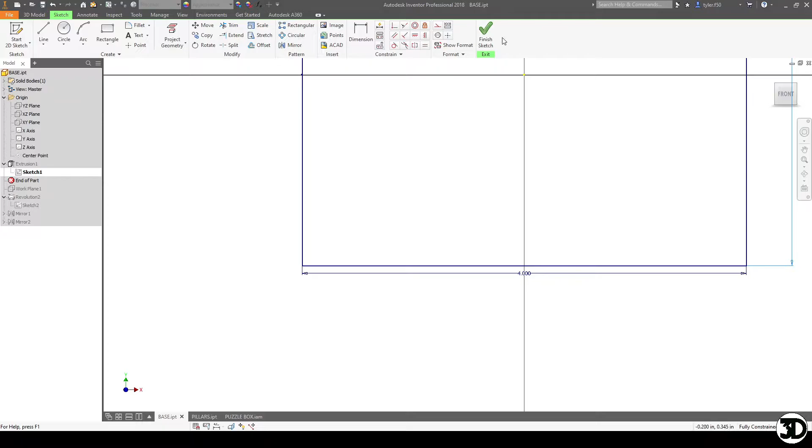To start off with, I made a base plate that is 3.5 inches by 4 inches, and 1/8 of an inch thick. So this is the first piece I designed.

Next, I made a pillar, which is going to be the corners, 1/2 inch diameter by 3 5/8 tall. After that, I wanted to make these pieces fit together.

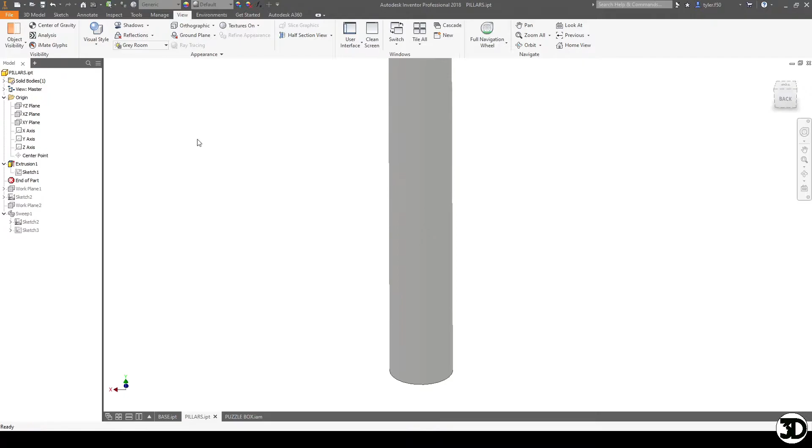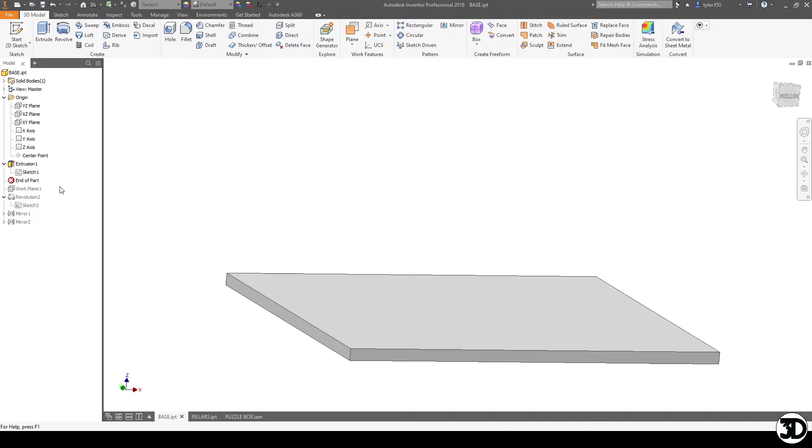The way I designed this is I made 2 work planes: one that's 1/2 inch away from the center point, and another that's 1/8 of an inch from the bottom. The reason for this is I wanted the base plate to be elevated by 1/8 so that there's a little bit of clearance, so the pillars are actually like the feet of the puzzle box.

Next, I did some sketches. The first sketch you'll see here is essentially going to be my dovetail groove for this piece. It has the dimensions of the plate, where it's going to be located, and then the groove size I was able to build upon after looking at this.

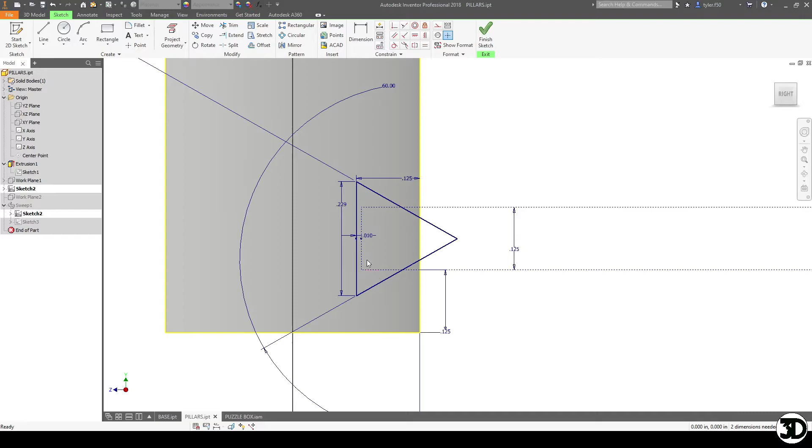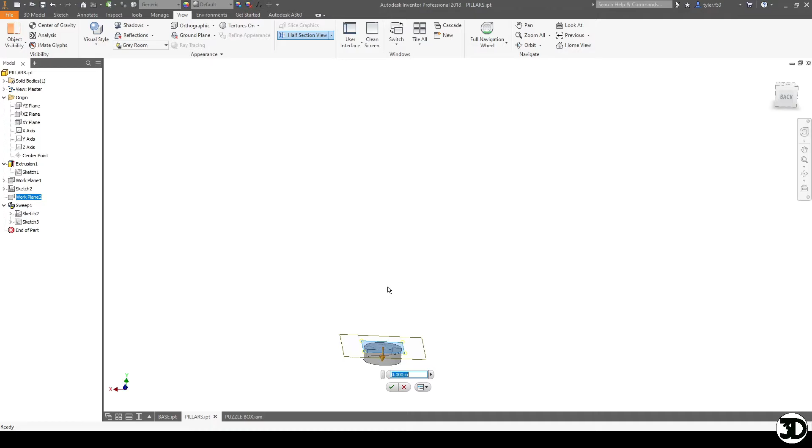So this is the first sketch that I did, and the second one is the pathway. It goes straight from that sketch and then curves 90 degrees, so when I show you the view of it as a section view, you'll see it has a bit of a groove that it'll follow so it could lock into place.

So this, of course, is the first thing I did. You can see that it has a narrowing portion, and then it'll just lock into place on each corner.

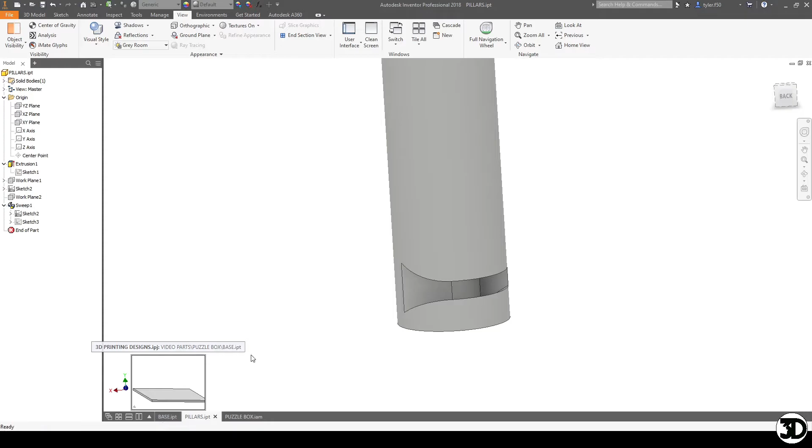Next, we're going to look at the plate and how I designed the corners. I did something very similar, creating another work plane specifically so that when I do a revolution cut, it's based off the center, so it matches up nicely. Next, I did the revolution cut.

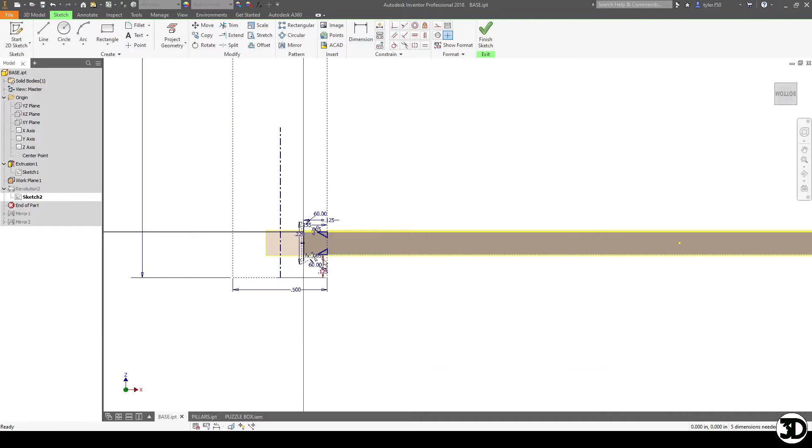Let's take a look at the actual sketch. I made a reference of the pillar itself, then sized the actual groove that's on the pillar, created the cutaway portions I want on the plate, and revolved it about the center point of where that pillar is going to sit.

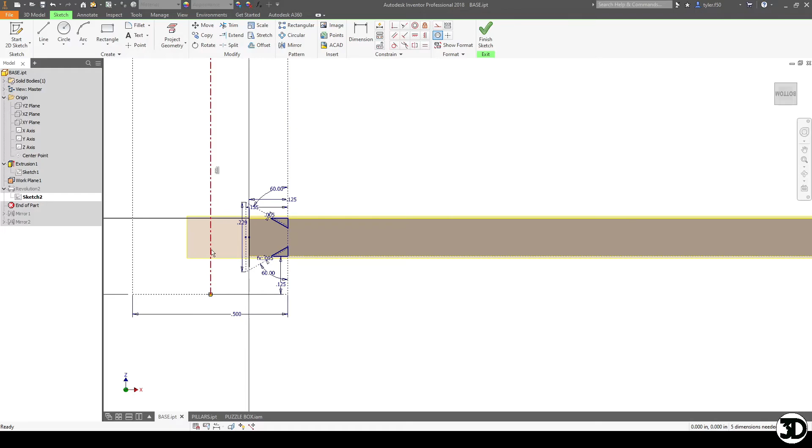It's 1/2 inch in both directions, so that when it rev cuts, that's a centered piece so it can rotate nicely into there. After that, I just mirrored it both directions so that all 4 corners have that.

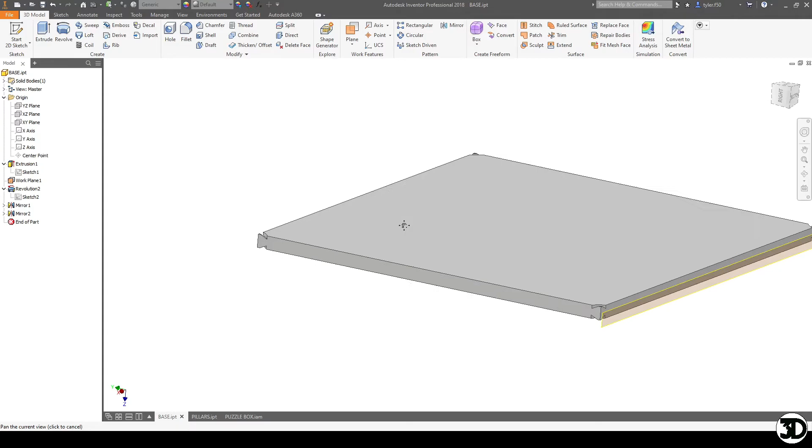Let's take a look at the assembly to see what that looks like and give you an idea of how this puzzle box is going to start to shape up. Here you can see the start of our puzzle box. It doesn't look like much yet, but as we progress, you'll see that it will come together nicely.

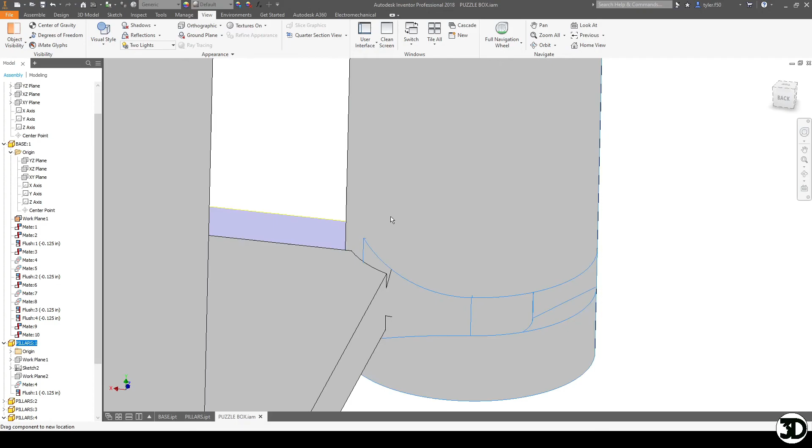I'm just going to show you how this groove is going to work when it fits in here. It looks a little funky at first, but essentially you're going to fit it in, and then rotate it until it butts up. You'll have a bit of an opening, but then that piece fits in there nicely. That's the start of this puzzle box.